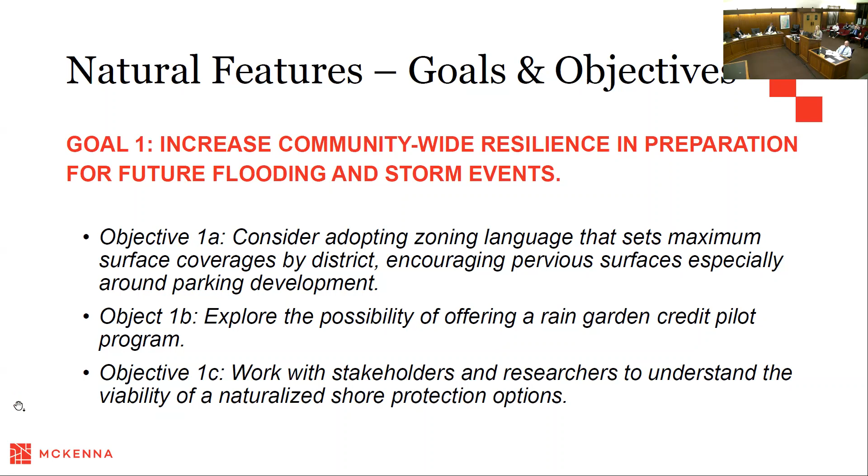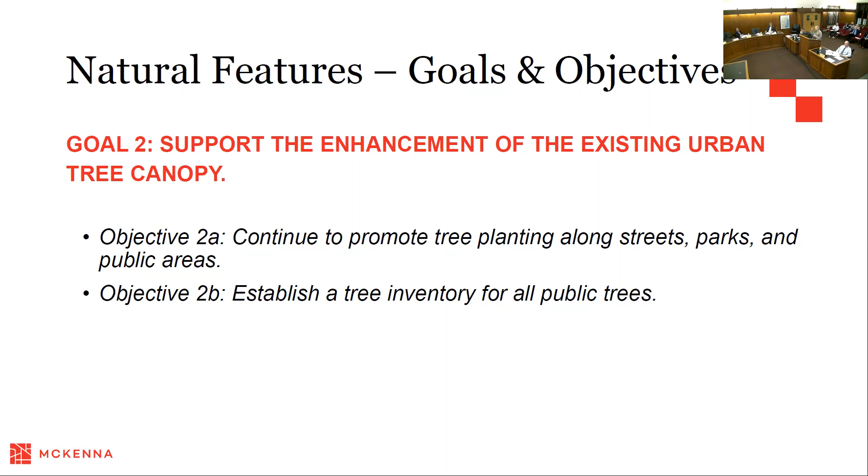If you go to the next slide, we have the second goal for natural features: the tree canopy, which was highlighted in public engagement both online and during the workshop. Everyone loves the trees—it's a huge characteristic of the community, as you all know. So we're looking at key objectives on how to keep that healthy. I just came back from a conference and learned all about urban tree canopies, so we've got some ideas for that. Like I said, there's more text associated with all of this online.

So looking at economic development next. During the community workshop especially, we heard a lot of feedback about businesses on the hill and how to activate that space. COVID has changed a lot of local business districts and commercial areas, with people now staying home to work more frequently. How do you foster more community vibrancy through events, streetscaping, and activation of public spaces, and further economic development? As we've heard, people want to focus more on restaurant and entertainment uses and less on office uses, at least on the first floor along Kercheval.

Speaking again to that localized economy that's shifted in the last two to three years, more people are starting home-based businesses, which gives more opportunity for mixed-use properties—we just mentioned condos on the hill, for example. We're also thinking about how to activate programming for small business and encourage events that speak to people staying in the community who would have formerly commuted elsewhere.

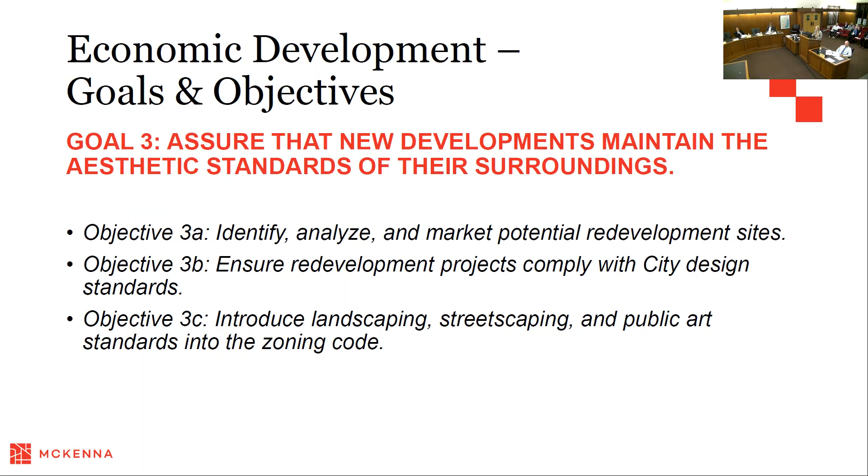Speaking to the historic district a bit as well, it's about ensuring new developments maintain the aesthetic standards of their surroundings. People overwhelmingly want to see the aesthetic character, especially downtown but throughout the community, maintained. So we're identifying redevelopment sites and ensuring redevelopment complies with design standards and introduces landscaping—that could all potentially be folded into the historic district if that's pursued.

So the next section, mobility, which there were a lot of very thoughtful, specific comments around sidewalks, crossings, and streets. So there's a lot of objectives, but they're all kind of very targeted. I was really happy to see people on the map, especially online, offer insights that I would never know, not being here every day.

So thinking about how the sidewalk network works, you have a great sidewalk network, but down to the point where there's a rock jutting out in one section, how do we handle that? It's something we wanted to incorporate. And then we saw a lot of people using bikes to get around, especially this summer, and thinking about how we can incorporate that, which leads into our next goal on this section as well: further vehicular and pedestrian safety.

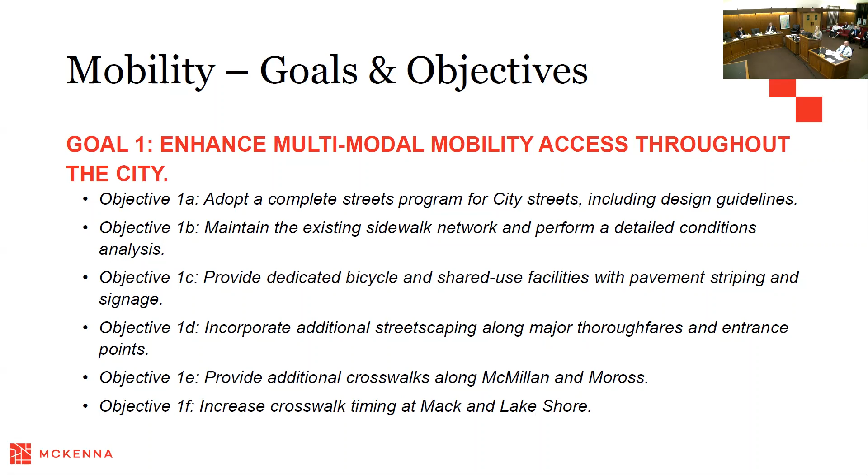So some opportunities there, thinking about what we call complete streets, making sure it's friendly for pedestrians, bicyclists, and also vehicular traffic. You won't see anything too radical. I know Lake Shore and the pathway is very controversial, but ultimately nothing too extreme, just really enhancing what we have currently.

So going to the next slide, talking about safe and efficient transportation options, like I mentioned, thinking about a dedicated turn lane along Mack. Obviously that would take some MDOT coordination, and we heard a lot about on-street parking, so there's some opportunity there.

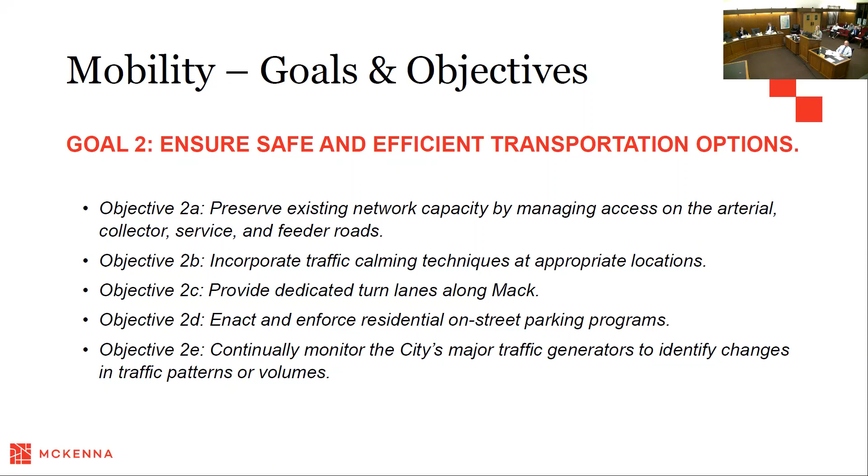And then also just making sure the city continues to monitor traffic. Not that that was identified as a huge issue, but we know as time goes on, things change, and it's good to keep a pulse on that.

So community facilities, obviously one of the things that makes Grosse Pointe Farms what it is, and we heard a lot about the Pier Park possibilities. Again, very detailed feedback, from hangers for towels near the pool, to wanting more programming throughout the year, and having a few more recreation opportunities in the city.

One interesting component is some of the opportunities throughout the neighborhoods to support a small, very limited pocket park, is what we call it. And then ensuring infrastructure remains supported. We know you're doing a great job with that, you're very active, and as we talk about the sanitary sewer separation, continuing to support initiatives like that.

We'll go to the next slide. I think land use is what we've been waiting for. So again, maintaining those design standards, keeping the unique traditional look of Grosse Pointe Farms, objectives that help specify for any new homes what quality of materials and level of detail must be incorporated.

And then also aware of what was going to be a zoning case, the residential garage challenge in a lot of cases, and how the width of some lots limits people who want to go up, etc. So looking at creating a zoning ordinance policy that's responsive to that.

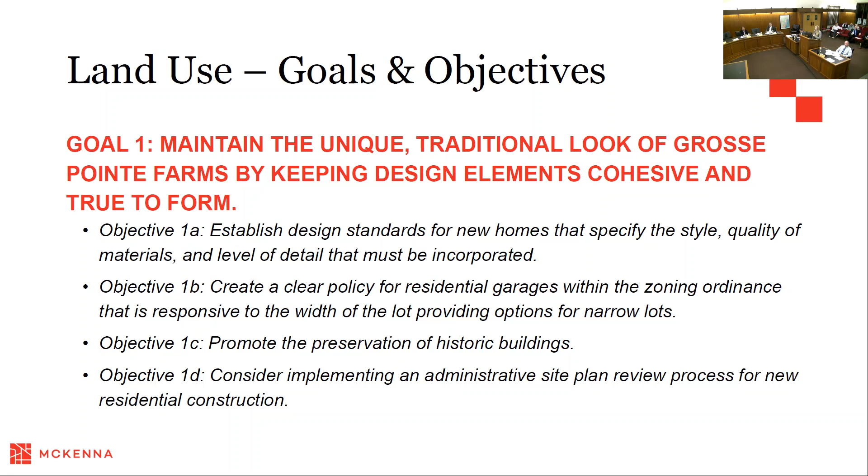The preservation of historic buildings, even potentially outside of that historic district, and looking at tactics around that. And then administrative site plan reviews potentially for new residential construction—that's kind of a best practice. So let's go to the next slide.

So we also heard that there's people who have a changing preference for housing. People want to age in place. During the public workshop, I had many conversations about the possibility of how can we stay in the community, but I don't want to stay in my large single family home.

So looking at where we could potentially support accessory dwelling units, mother-in-law units in the back of residential areas that have lower density, so we're not building up on these higher density lots. And then also incorporating mixed use, potentially condos in existing commercial corridors, so on the hill, potentially on Mack.

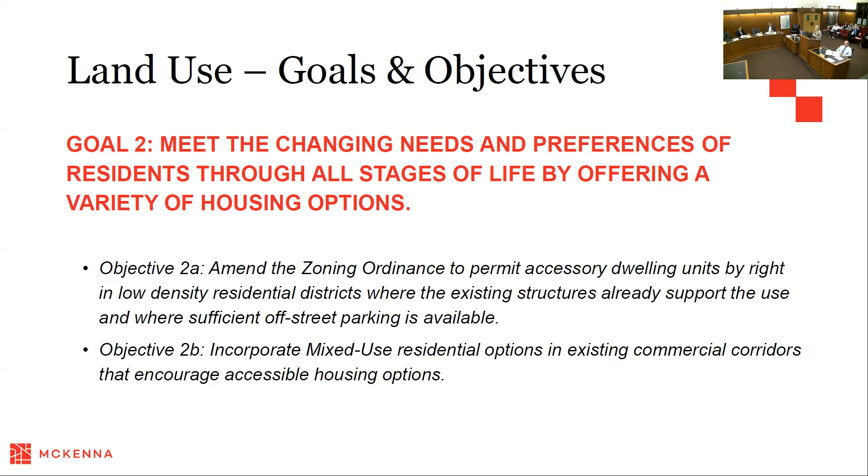Those are kind of the highlights, and if you go to the next slide, we can take a look at the future land use map. You won't see anything too...

So those are the highlights from any kind of changes to the future land use map and what we would be looking at for any of those.

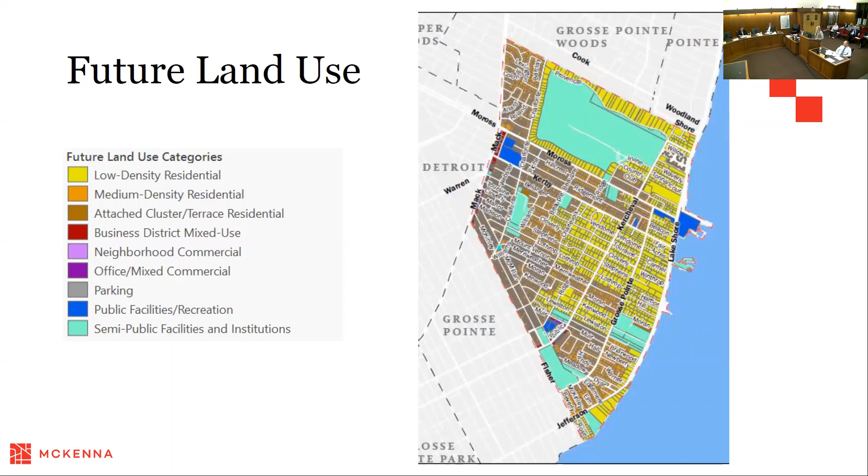Hi, Jane. At the planning conference last week, I heard this concept which was pretty neat: instead of assigning a developer a mandatory number of parking spaces—say for a dental office, mandating 10 spaces or a number based on square footage—you take the approach that the marketplace sets the number of spaces. My question is, would that help reduce the amount of impervious surface? Yes, certainly, absolutely. Because we're not mandating to them what they have to do, they're telling us they can get by with 8 rather than 10.

So could we then say to them, well, why don't you put something green there—do some plantings, that kind of thing—which falls into the natural features goals and objectives? So you've got two things going for you: reducing the amount of impervious surface, plus adding more green space. We could add that to the plan. Is that something we could have as a discussion item?

In the natural feature section, you'll find strategies similar to what you're describing. We haven't gone so far as to eliminate parking minimums here. That's a discussion I'd love to have with you and the community. But we do have strategies on how to reduce parking and instead plant natural swale or green type opportunities. If you look through that, I think you'll find there's a lot to it. Then we can talk about eliminating minimum parking requirements.

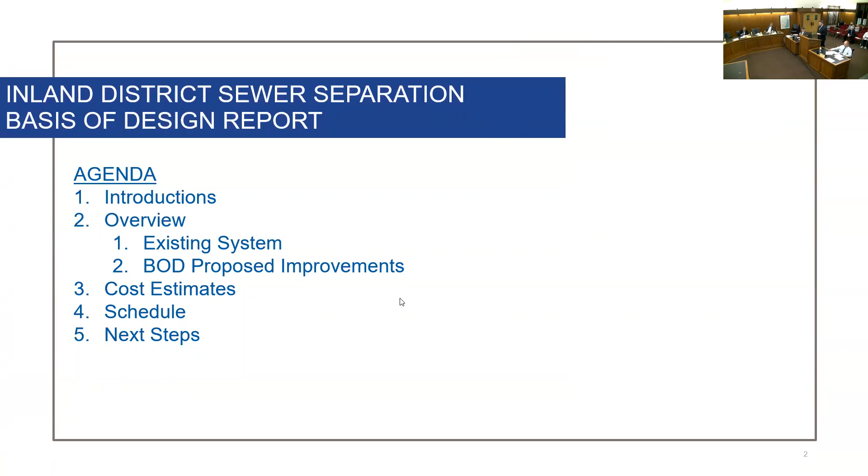BOD is the basis of design: proposed improvements based on the selected alternative, the updated cost estimates, schedule, and the next steps. With that being said, you all know me, Justin Vandekreek. I'm Vice President Principal at Hubbell, Roth and Clark, and I'm the managing partner for Grosse Pointe Farms. Tonight, you guys have heard me talk a lot about this over the years.

And you see the reports, and we've been here many times. But I want to introduce you to my partner, Mr. Tom Maxwell, who's going to be the partner in charge of this specific project. And I'm going to turn it over to Tom and ask him to be brief. I'll come back up at Q&A.

All right, I'll do my best. Thanks for having me here today. Got about 20 slides to go through. Tom, might need your projector voice just a little bit. Okay, get in the back.

Okay, as Jessica said, we're going to go over the basis of design. That consists of 3 contracts as we see it. Contract 1 is the force main and gravity sewer, shown as the purple line going out to the lake. Contract 2 is a stormwater pump station on the corner of Chalfonte and Moross on city-owned property, shown as that gold square. Contract 3 would be the sewer separation of that light yellow area, commonly called the northwest and northeast quads. That consists of the residential area on the left, the northwest quad, and the Country Club of Detroit on the right. It also includes some relief sewers in the southeast quad on Mount Vernon, McMillan, and McKinnon streets.

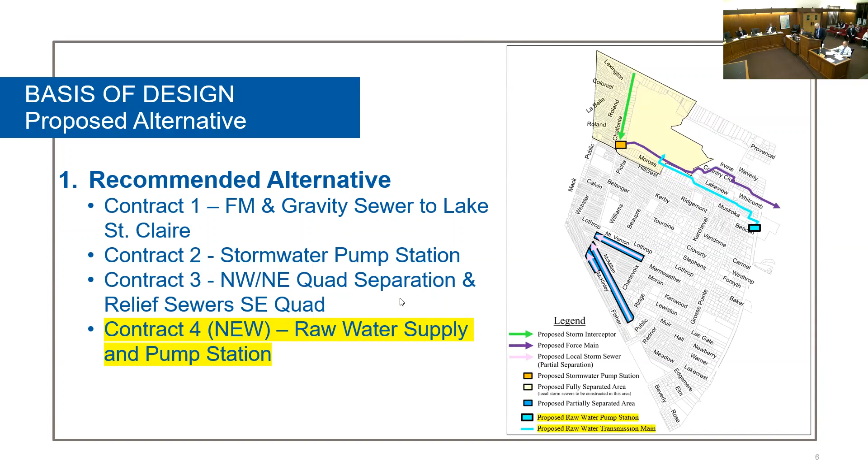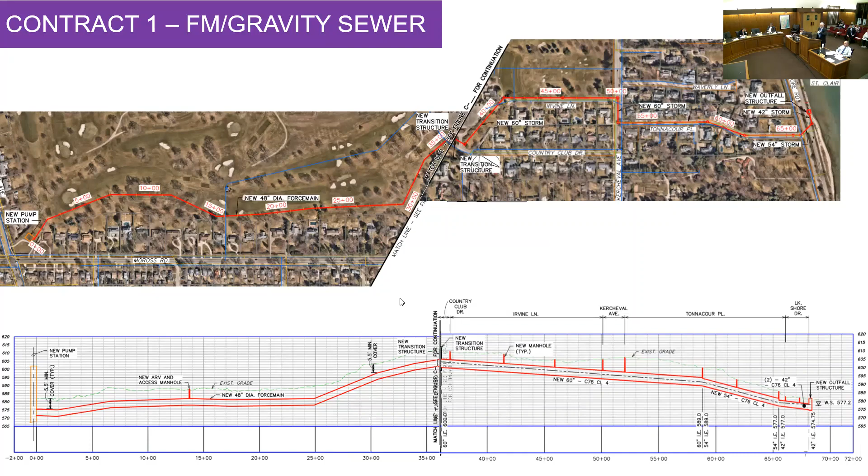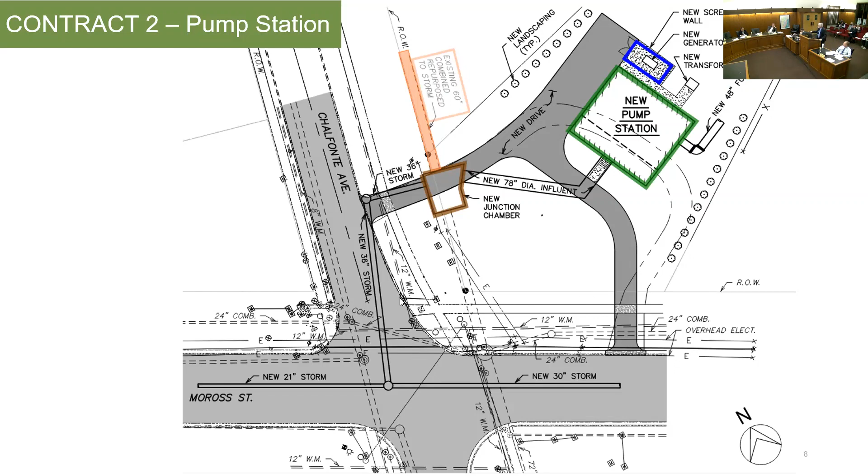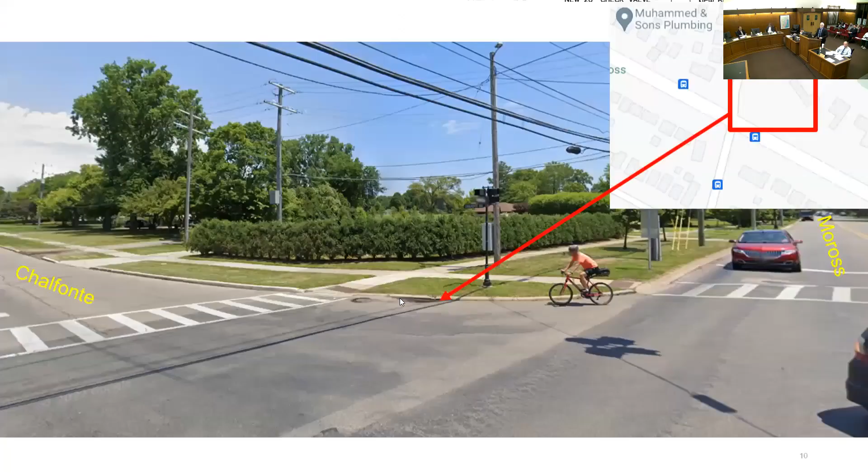So what we propose is a Cape Cod style exterior. This is just to get you familiar with the setting and where we're going to put it in place. Behind that hedgerow is where the pump station would be located, on that corner.

Tom, can I interrupt you, or make a comment? Sure. I think it's important that the public and also council know that this building exterior you have in your plan right now is just suggested, architecturally. It doesn't necessarily mean it's going to look just like this - we can come up with a different design, but it's been your experience, right? I think you explained to us in our meeting that this fits, and when people look at it from the roadway, it's not going to be as obvious a pumping structure, so to speak.

You've got an example for us, don't you, Tom? I do, but I just want to point out one thing you'll notice - we've got it in Cape Cod style, and you walk up to that front porch, if you will, and then you walk down, because what we need is a lot of clearance in that upper level so we can pull those pumps out to the floor. You can't do it with an 8-foot ceiling, you need like 13, 14 feet of clearance. So that's the reason it's situated this way - it had to be a colonial or a Cape Cod, something of that nature.

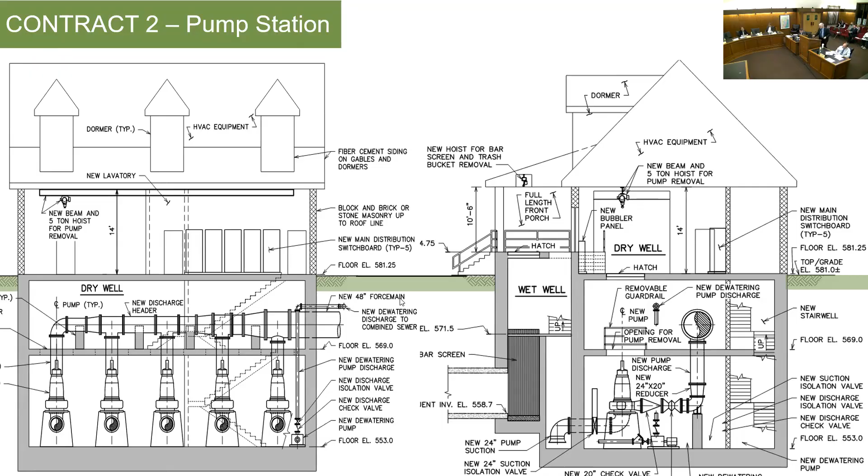My wife looked past my packet and said, 'Oh, that's a beautiful house, when are we going to do that?' She wants to move in. I told her, you can't move into the pump house.

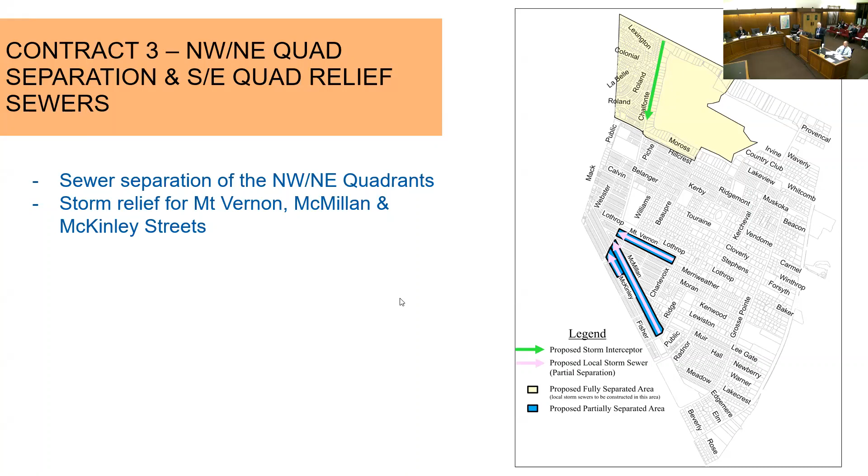So now moving on to contract 3, essentially this is the sewer separation. This is what's going to get the flow, the stormwater, down to the pump station, by putting in storm sewers in that yellow area. They'll range in size from approximately 12 to 36 inches in diameter, and they'll be put in the road right of way - that's the northwest and northeast quads. In the lower area, the southeast quad, we're going to put in relief sewers on Mount Vernon, McMillan, and McKinley.

Okay, so the benefits of the separation include significantly reducing the possibility of basement flooding in that northwest and northeast quad. We're going to reduce the flow of stormwater to the Kirby Road sanitary pump station by 31%. This is going to free up capacity for the southern area of the city, because you're getting all that stormwater out, so now you can utilize that capacity in the pump station and the sewers for the southern areas. So the benefit is throughout the entire inland district, not just that portion separated. Exactly, good point - and in addition, you'll benefit your neighbors in the regional collection system.

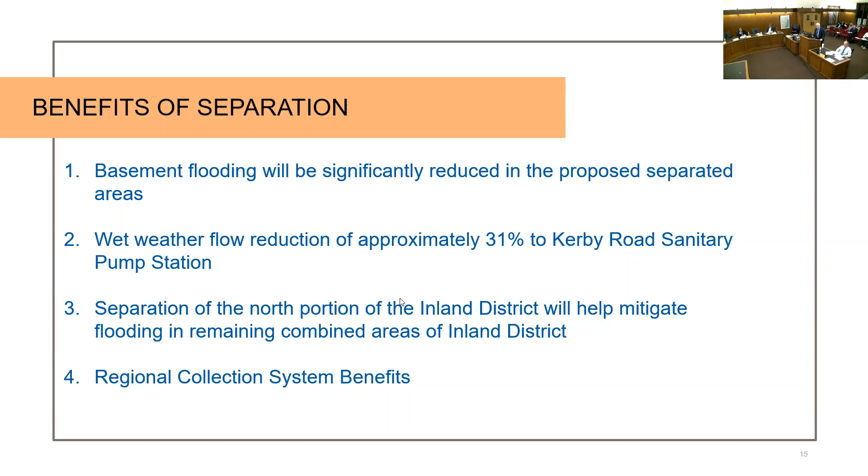Okay, sorry for the delay. Contract 4 - this is what we're going to build as part of that memorandum of understanding with Country Club Detroit, and this is what's going to get that raw water up to the country club. In the center of the picture, you can see the housing for the pump station. It's pretty plain, so we would envision putting a lot of landscaping around that, or a masonry wall - it depends on what the city would prefer. It's going to be located on the water treatment plant site.

You can see the orange arrow, hopefully you can pick that out. And that's where it would be located, just south of Moross and west of Lake Shore. Is that good? You found it?

Okay, and then over on the right-hand side you kind of see a map view, and the little blue dot is the raw water pump station, and the heavy line is the 12-inch water main that's going to take the raw water up to Country Club Detroit.

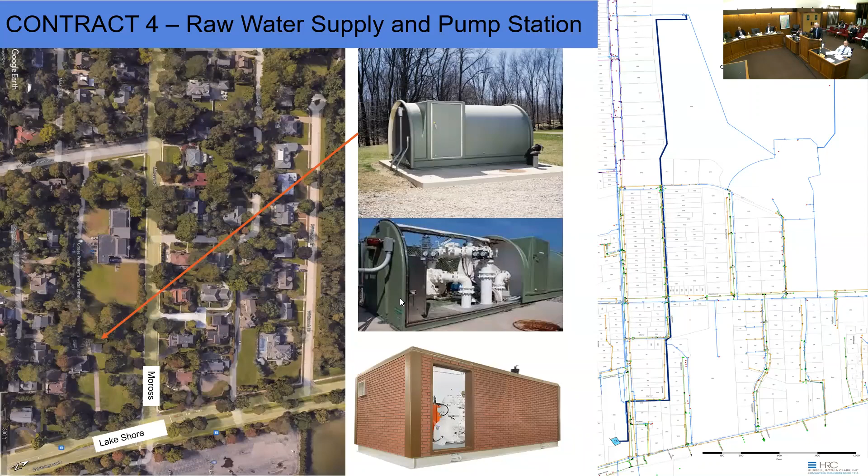So here's the project cost. Let's define that real quick - that's all encompassing, right? That's design and construction, legal fees, administrative fees, etc., to get the job done. And that's for all 4 contracts here.

You can see contract 1 is approximately $10.2 million - that's the force main and gravity sewer. Contract 2, pump station, is approximately $17.1 million. Contract 3, sewer separation, at $12.2 million. And then contract 4, which is the raw water supply, at $2.2 million. So the total project cost is $41,712,000.

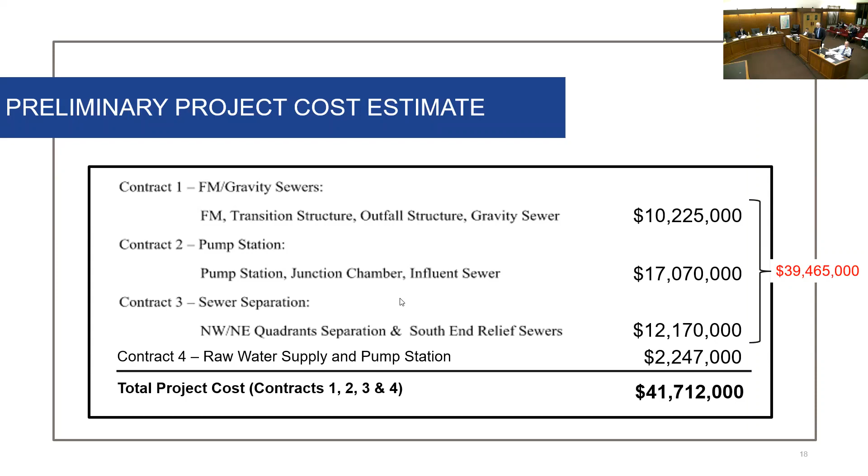So now I want to call your attention, hopefully you can see that. I blocked out or bracketed contracts 1, 2, and 3, and I did that to look at funding. Contract 4 wouldn't be eligible under the SRF program, so we're just going to look at contracts 1 through 3. It's $39,465,000 project cost to do those 3 projects.

So this is a busy slide, so bear with me here. Go ahead. Yeah, I thought we were gonna skip all those things. We're not sure where we're going yet, but I want to keep it brief, because we're not quite sure where we're headed. Go ahead. I think that, you know what SRF is, and I do, and others, but I don't think that the majority of the folks should, so.

Explain that. People should understand that there are 2 ways that we could fund this in the future, one through this program called SRF. So maybe you could go ahead and explain what the revolving fund is and what that means to us. Sure, as Councilman Wood stated, there's a couple approaches here.

The only other thing that I wanted to say is that the city is going to also pursue a hazard mitigation grant through FEMA, and that's for the design of all of these projects, 1 through 3. That FEMA grant will give you 75%, that covers 75% of the design fee, and the city's got to cover the other 25%. Does that answer your question tonight?

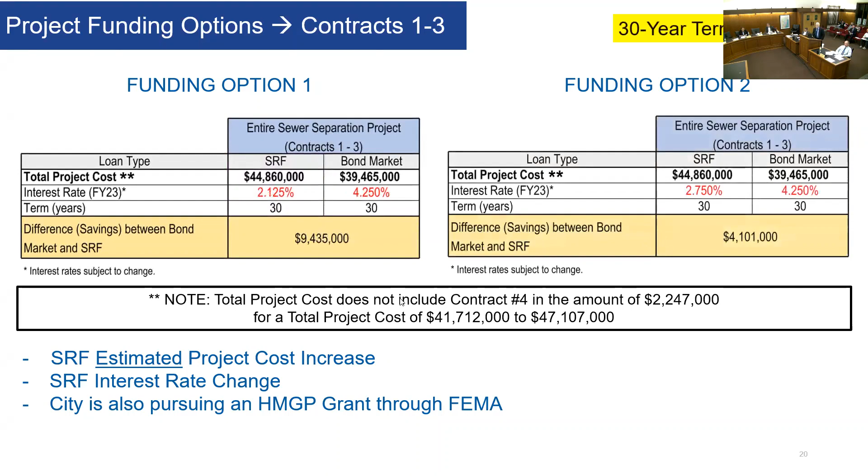Okay, we're getting close. This right here is a baseline schedule if the city proceeds without SRF funding. On the left are the tasks for the contracts and funding, and on top you can see it starting in year 2022 going across to 2026, so roughly a 5-year overall program.

All four contracts have design, bid award, and construction timelines, but contract 1 also has pre-purchase of materials. As mentioned, we want to do the construction of contract 1 in the golf course over the winter season. We don't want to impact the golf course, so to make certain of that, we want to have those materials on hand when the contractor is ready to go.

Right now there's been a lot of delays in obtaining materials. So typically we wouldn't do this, but under the circumstances and the fixed date we're trying to attain, we want to do that upfront. That's something unique, that's the only reason I bring it up.

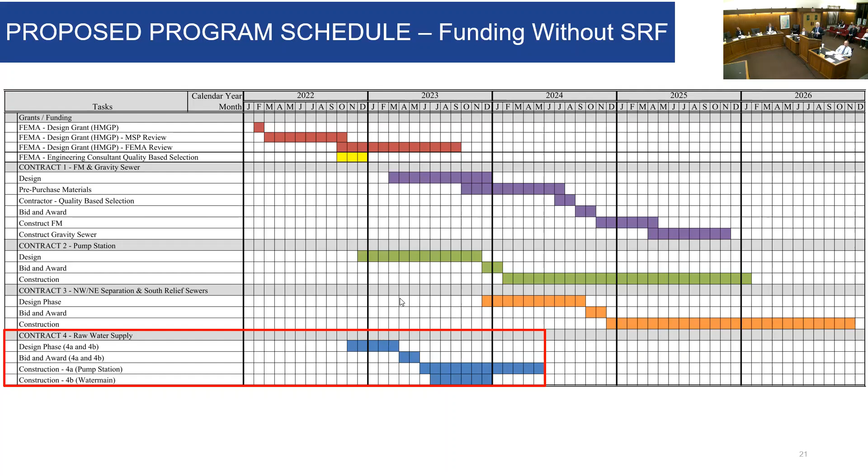The only other thing to mention here, in that red rectangle on the bottom, is contract 4 — there's nothing that requires it to be built now or later. You can proceed with that at any time.

I know this is a busy slide, but the schedule on top is what we just reviewed. The schedule on the bottom would be funding with SRF, which is what the mayor brought up. That red rectangular area boxes out the additional requirements that SRF requires, but overall it doesn't impact the schedule much to speak of — it's still a 5-year program, and we've done this since day one.

We were the first one to submit a project plan 30 years ago, so we've dealt with these deadlines. We know we can do it, but they are rigid — there's no flexibility in these dates. They have to be committed to.

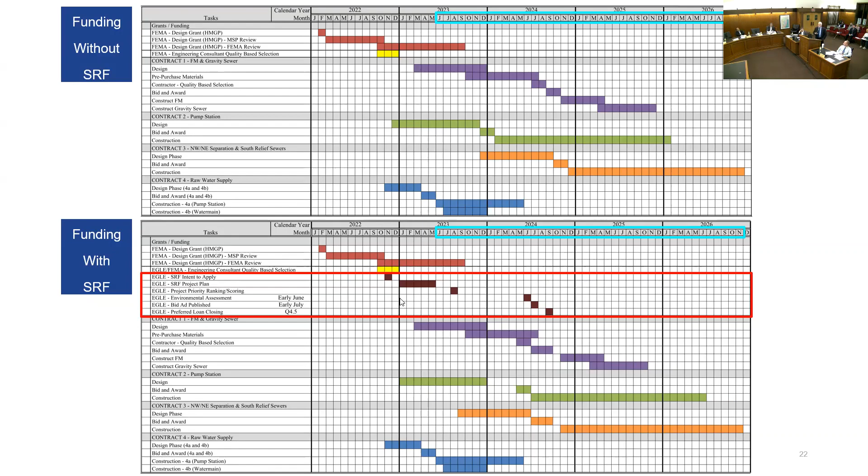So, next steps. The first thing we need to do, if we're going to go after SRF, is apply for a notice of intent for an SRF low interest loan. It's a one-page document, very simple, but you have to do it by November 1st. So we need to commit to that.

Item number 2, in parallel, is we need to go out on a notice of intent to sell bonds in case you don't get the SRF loan, and that would be in the neighborhood of about $45 million. This is a 5-year program, so we thought we should probably add 10% for that duration and inflation, et cetera.

Item number 3 is required because you're going to go after this loan and this grant — there's federal funds involved. Because of that, you have to go out for a quality-based selection for engineering services, for the SRF project plan, for design, and for construction engineering. As a result, you've got to do that really quickly in order not to impact those deadlines I showed you. So with that, I'll turn it over to any questions you might have.

That's a lot, I know. Let's just start with left. Any questions? You sat through the presentation before, though.

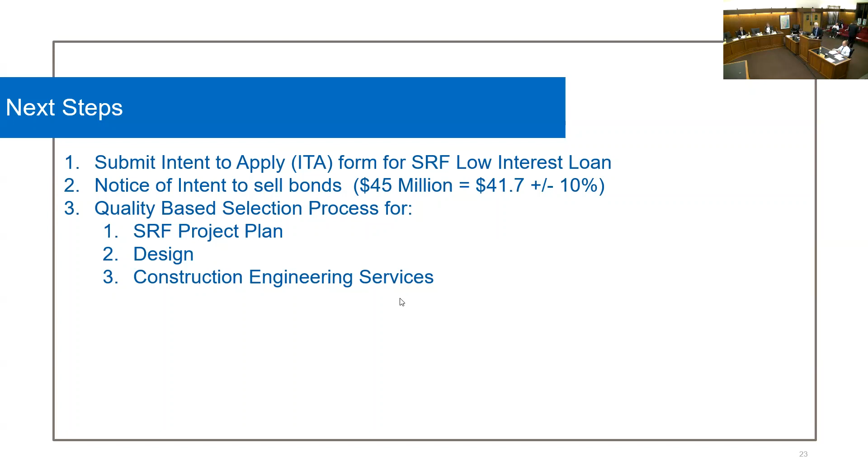Appreciate it. All right, item 9, consent agenda. Does anybody want anything withdrawn from the consent agenda for individual consideration?

Not hearing any. Someone want to move approval of the consent agenda? I will move approval, Mr. Mayor, with special kudos to the... All right, second. All in support, say aye. Aye. Any opposed? Motion carries.

Reports, you have the public safety report. I guess some of it was in September, so we have some more coming in November. Other business, Mr. Reside. I have no other business.

Any other business? I'd like to thank Sergeant Dion, who was at the flag retirement ceremony today. I appreciate it, I could not make it, but the Daughters of the American Revolution does a flag retirement ceremony every year, and we have tens and tens of flags retired. It's a great service. We have a box here at City Hall, and it's a great event with one of our Boy Scout troops to retire our American flags properly. So thank you, Tom, for going.

I appreciate it. Anybody else on council have anything? Yeah, go ahead, Joe, go first. Just want to mention that our traffic citations are double this year versus last year, so the speeding ticket message is getting out there, and we want to keep that going. Thank you, guys, be careful on Ross Road.